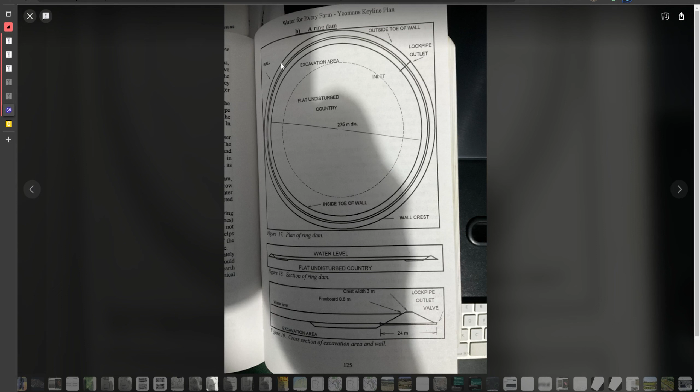You need to pump water to them. So this one is called a complete ring dam or just a ring dam. Then we have also a turkey nest dam, which is another kind of a ring dam that is completely enclosed. And then we have what is called the broken ring dam, which is partially enclosed. So let me show you a couple of images of that. So we can see again the complete ring dam on this picture at the bottom, and at the top we have the broken ring dam.

Now in this video we're not going to cover the broken ring dams because they're kind of very similar to any of the other dams we covered so far. The only difference is that there is a flat undisturbed ground in the middle, and this is also the same for the other dams. But apart from that, they're basically the same as all the other dams that we've covered so far. For example, the contour dam would be very similar to this. It's just that when you're doing your excavation, you're not going to touch a certain area in the middle.

Now, what is the actual area that is left untouched? I couldn't find it from the instructions in the books, so we can use some arbitrary value or dimension for that area. Whereas the actual excavation takes place around the embankment, and then that flat undisturbed area is left in the middle. So we're going to do a complete ring dam, and then we're also going to do a turkey nest dam, and they're kind of the same. So I think the turkey nest dam, the difference with that was that there was no undisturbed ground left in the middle, so that's completely cleared. So those are kind of more simple in that way.

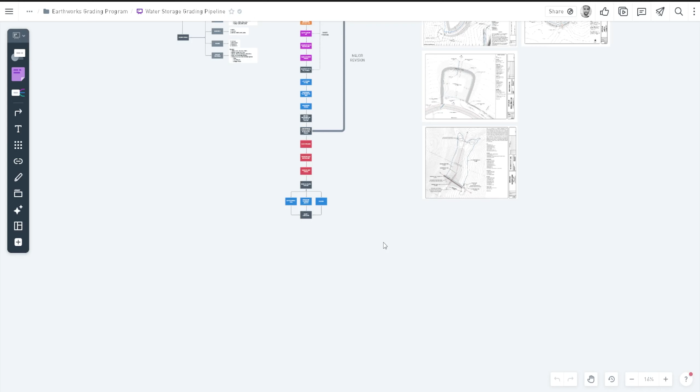Here we have in the book The Challenge of Landscape another diagram of the design of a ring dam. So this is the completely enclosed ring dam with the undisturbed area in the middle. So let's break this down to its building components. I'm going to take a screenshot of this image and paste it in our working document. So I'm going to move that right here and maybe expand the image a little bit so we can draw on top of it. And so the thing that I notice right away is that it follows the same basic components that the other dams have.

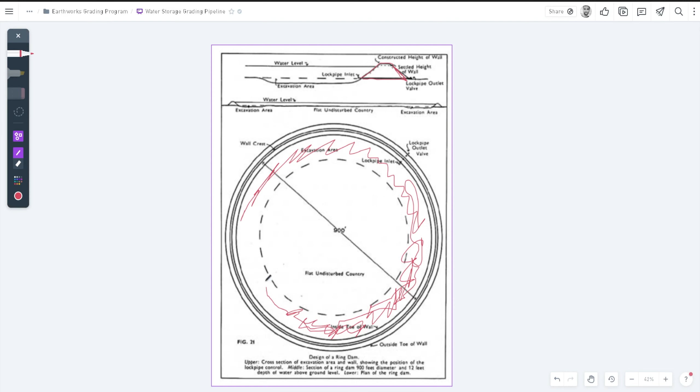We have obviously the embankment right here that encloses on all sides. Then immediately around it we have the excavation area. So all of this stuff right here is just excavated ground, and I'm not sure what is the depth of this excavation or what is the batters of it, but we can work with any arbitrary values, really doesn't matter. I would imagine that it's again maybe at least 1 meter deep below the embankment, and that the batters are 2-to-1, both for the excavation and for the embankment. Although I guess it depends on the site.

The embankment could be with steeper batters because I would imagine these are very low embankments, so they will be more stable even with steeper batters. But of course the material is what's going to dictate this to a good degree, as well as other factors such as the compacting equipment, who is doing the compacting and under what conditions that is done, and so on. But for our purposes we're just going to use arbitrary values for that.

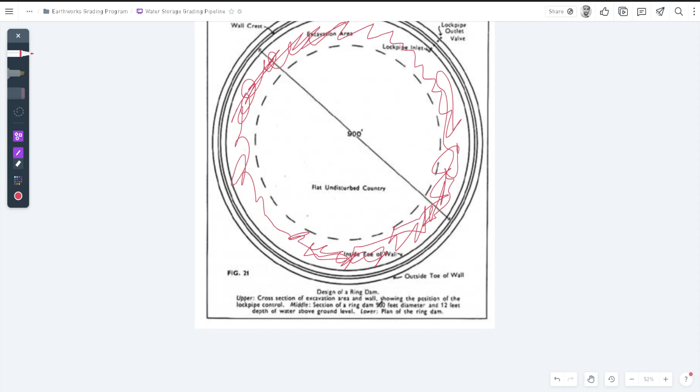Then for the undisturbed country, well, I guess this will depend on the site. Obviously, if we don't have a lot of space for leaving this undisturbed ground in the middle, then we'll just have to narrow it down to a smaller area. And the crest of the embankment seems to be very narrow, so I would put this to be around 2 meters to 2.5 meters. And he actually says here at the bottom that this section of the dam from one crest to the other is 900 feet in diameter, and then we have 12 feet of depth of water above the ground level.

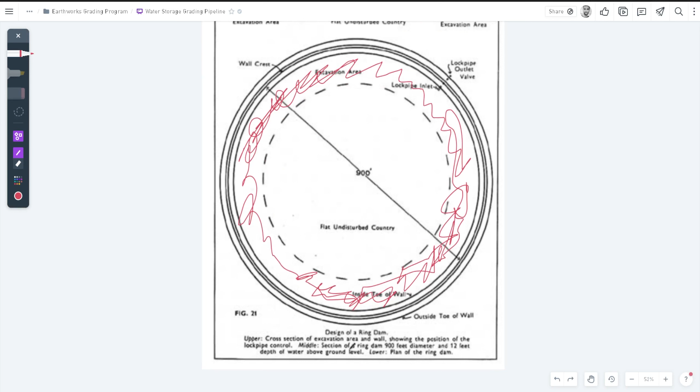So I would imagine he measures it from here up to the water level, so that's 12 feet. But this depends on the site, in terms of water depth. You can't necessarily secure the same water depth on every site. We're just looking at these as indications, not fixed criteria for our purposes.

If we look at this cut section, we can see the embankments on this side and then the excavation right here. Then this is the undisturbed ground. And then we have an excavation on the other side and the embankment there. So this basically repeats all around.

So let's find a site we could possibly use for this. These being the absolute highest dams you can put on any landscape, we need a fairly flat ridge to find a good site. Something very high up in the landscape that you could pump water to, and from there reticulate it. One detail I didn't touch on is that there's a lockpipe on one side, on the lower side of the site.

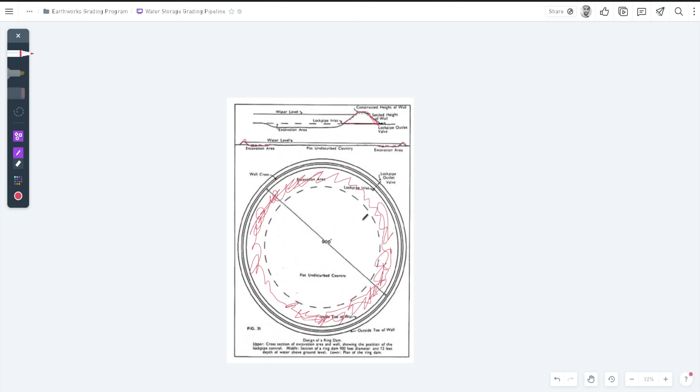We're not going to design these in our drawing because we already did that on other dams. It's basically the exact same thing, so we'll leave those out to save some time. I may dedicate a video specifically to grading the lockpipe trenches for any embankment, but I covered this in depth in one of the videos on the Keypoint Dam, so I might leave that out entirely. Let's start by opening QGIS and try to find a site.

I'm going to use the DTM that you also have in your project files, the same one we've been using all along. Let's extract a contour map from this. I'll select the DTM, go under Raster, Extraction, Contour, and do a 1 meter interval between contours, then run that algorithm. Now with that done, we can exit the algorithm and turn off the DTM.

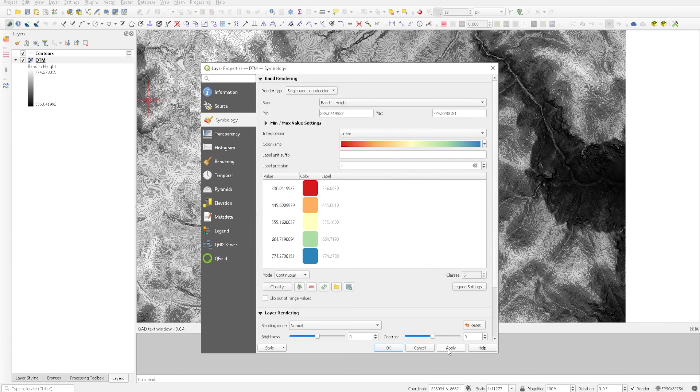Let's select the contour layer and click on the open layer styling panel, and set a black color, maybe a little transparent, so we can see what's happening. Let's also double click on the DTM, go under symbology, and change the render type to single band pseudo color, accepting the default spectral color ramp, then click apply. These will be in reverse, so let's click this dropdown and choose invert color ramp, then apply again.

So let's look for a suitable site. We can see maybe right here we have something, but it doesn't look very extensive, so let's look for something with more space to work with. One thing I forgot to mention is that this shape isn't necessarily what we'll be able to have—this is a very idealized version. What we're probably going to have is a more irregular looking shape.

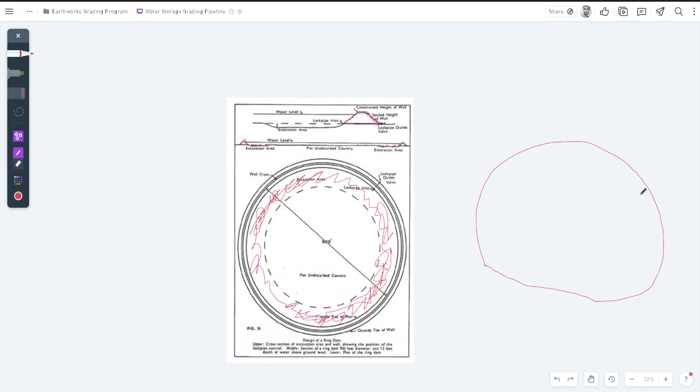Instead of a perfect circle, we'll maybe have something like this, obviously with not so many wiggles, but less regular. It may have a more irregular shape because for the most part we have to loosely follow the shape of the site we're building on. For example, if we build something that's a perfect circle, that would actually be a negative for us because it doesn't fit well with the geometry of the underlying geography.

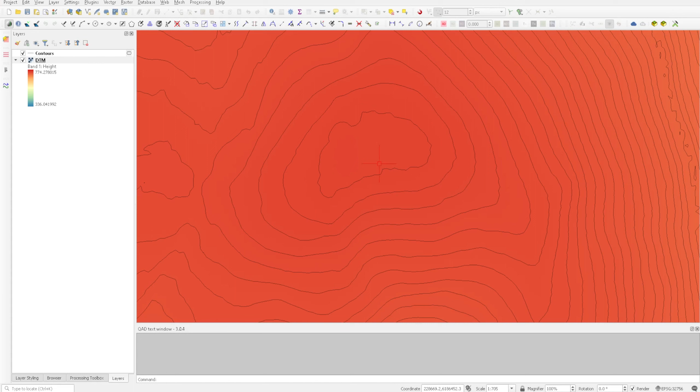That would create a lot more fill material than necessary. So if we loosely follow the geography of the ridge right here, we'll probably get away with needing less material. I'm just going to observe here and try to find the site. This one right here looks more or less okay, just about here. Let me look around a little bit more—we possibly have another one right here.

I think I'll go with the wider one I found, which was around 100 meters. Was it this one? Yep, so maybe we'll go with this one. With that selected, let's create a new layer. Click on the new shapefile layer button and call this boundary. We'll set the geometry type to polygon and press OK.

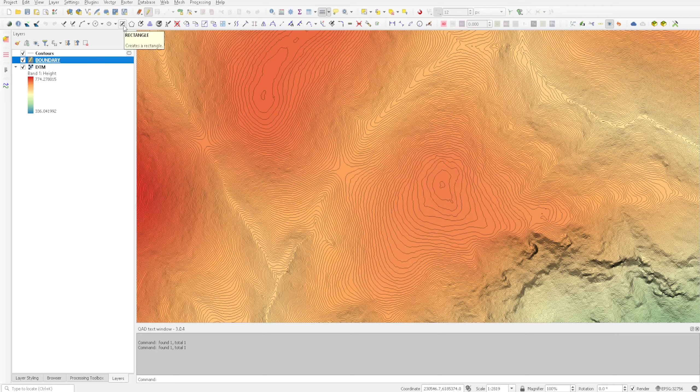Then we will select this boundary layer and enable the editing. With the QAD plugin, we are going to use the rectangle tool and make a rectangular shape right here, so we can crop out this site. With that done, we can select the boundary, toggle out of the editing, and save the changes.

Then let's select the contour layer, go under vector, processing tools and clip. For input layer, we will have the contour layer. For overlay, we will have the boundary, and we will run that with these options. Then we will exit out of the algorithm and hide the contours, the boundary, and the DTM because we don't need them anymore. This is the clip map that we're going to work with.

Now from here, we should clean this map up before we continue, as we always do. So let's select the clip map and right click first and make a duplicate layer, just so we can preserve the original in case something unexpected happens. Then select the clip map, and let's first of all clean up any small noise that we have, like this one right here.

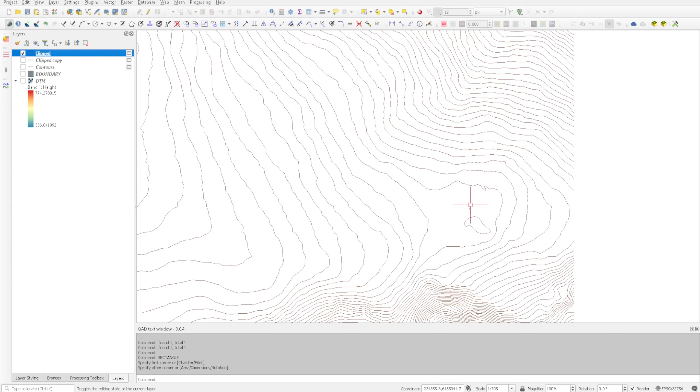So let's toggle on the editing. Go under the select features by expression tool, and in the expression field type $length smaller than, let's try a value of 25 meters, and click on select features. You will see this is going to select some of the noise, but it also selects some of the contours that we do want to preserve.

So maybe let's reduce this to 15, even that's too much, maybe 10 or even 5. There's not a lot of noise on this map actually, so that's all right. And with that done, we can actually, maybe there's a little bit more. Let's go with 10. Yep, this one got selected now.

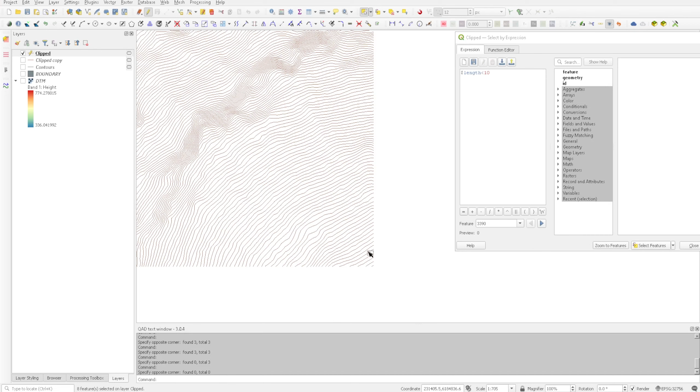Now let's close out of this and we can zoom in here. Then let's go back up to select features, select this tool, then hold the control button and make a marquee selection, just the left mouse button holding and dragging out, and select these contours holding the control button. This will deselect them basically, so we don't delete them, because I don't want to delete these major contours. I just want to get rid of the noise.

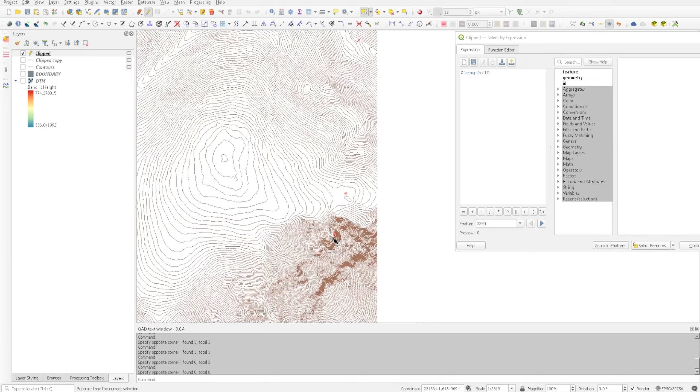So we can also do that for this one on the edge right there. Again, just holding the control button, left clicking and dragging out the selection, you can deselect those. Let's also zoom in here and see what's happening with these ones. Okay, that's all right, we can delete that one, we don't need it. With that done, we can then just click on the delete button right here, delete selected, and that will remove them.

The next thing we should do is to toggle out of the editing and click to save the changes. Then with this contour layer selected, let's type simplify in the bottom left corner of QGIS, there's the search field, and double click on the simplify tool. For the tolerance on this algorithm, we're going to use I think 0.5 will be enough. Simplification method will be set at distance, and then we will click on modify features. This will remove many of the unnecessary vertices or points on these contours.

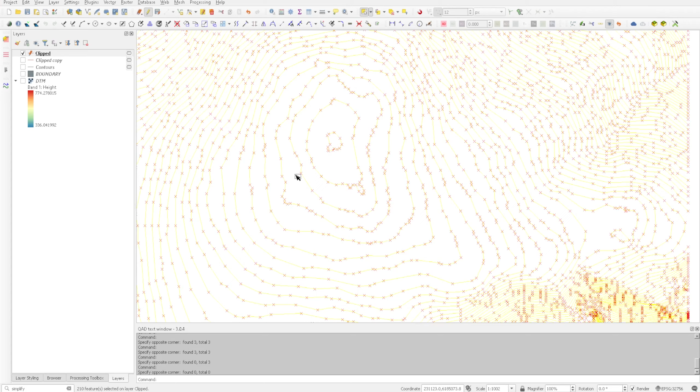Then let's close out of this algorithm and zoom in here to see how many vertices are left. So this looks pretty good to me. It didn't remove too many points, it removed just enough, so we can work with this.

Another thing we should do while the editing is still toggled on is to go back to select features by expression, and in the empty field type geometry is null. So we will use this basic script to select any geometry on this layer that may be empty, because that can cause issues. Just click on select features. In this case it didn't find anything, so that's good. Then finally let's select this layer, toggle out of the editing, and choose to save the changes.

Now we can rename it. So right click, choose rename, and let's call it contours-1 meter. Then we can right click and choose export, save features as. I will export this as an ESRI shapefile and uncheck ID and FID because I don't need those inside of Civil 3D. I will uncheck add saved file to map, and then click on the ellipsis button under file name.

I will save this to your project files for the ring dam video, and I will call this the survey data folder, as all the other ones are also called like that. This will be contours-dash-1-meter. It's also good practice to put the EPSG code 32756, which we can see in the bottom right corner of QGIS, and also under the contour layer itself.

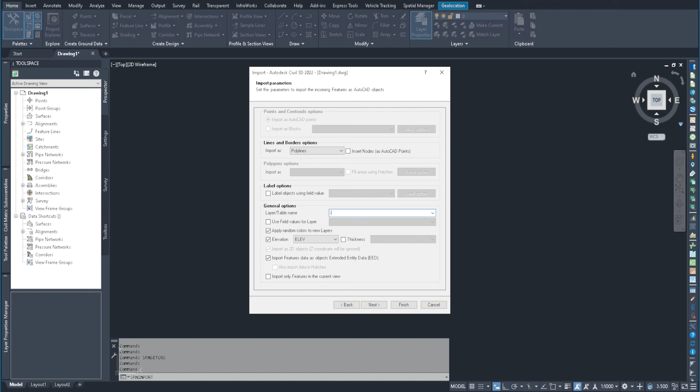I'm going to now navigate to where the files are, which would be under the storages chapter, survey data, and there are the contours. Then I'll click next. The first thing is to check the elevation tab, so just make sure this is checked on under general options, and then select the elevation attribute. For the name, I'm just going to call this 0-contours-1-meter. That's about it. Now you can click finish.

This should import the contours and we will be able to see them here. If you did get an error here, that's okay, you can ignore that, just click close. So here are our contours.

The very first thing to check is whether the elevation data is really there, just to be sure. Select one contour, right click and choose properties, and we can see right here we have an elevation value, so that's a good sign.

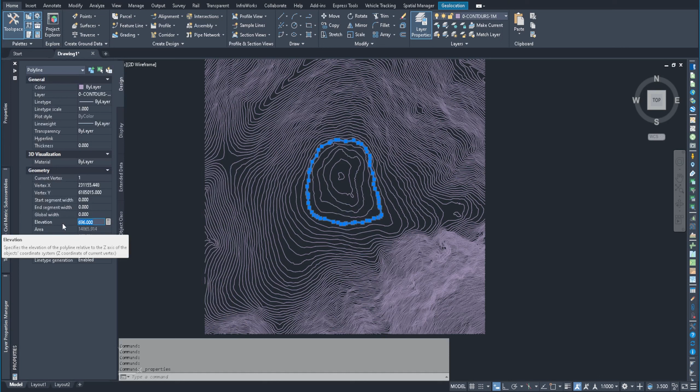Now we can select all of these contours just by either pressing Ctrl and A, or just left clicking, then dragging your cursor out and left clicking again to make a marquee selection. We will create now a new surface just by right clicking on surfaces under the tool space and choose to create a surface.

Let's call this, under name, existing ground. Then for the style, we can change that to 1 meter and 5 meters just by clicking here under style on the ellipsis button, and there is a preset called 1 meter 5 meter background. Let's select that and press OK, and then OK again.

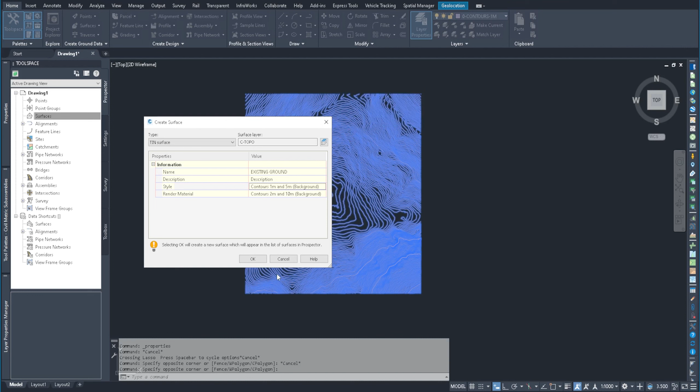Now let's expand surfaces, expand existing ground, and expand definition. We need to tell Civil 3D what to use as a definition to create this 3D surface. In this case we have contours, so we can right click on contours and choose add, and our contours are already selected, so it will detect that. The only thing we need to turn on is swapping edges, so we will turn that on here and press OK.

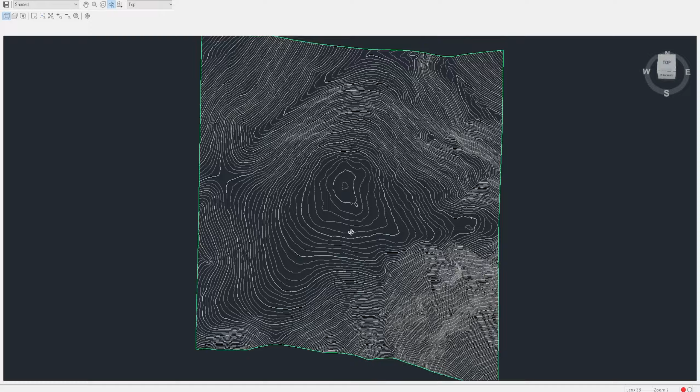And now it will create the 3D surface. There it is - you can know it's a surface because it's outlined by this green boundary. We can also check it out in the object viewer just by right clicking on the existing ground surface, choose select, then right click anywhere on an empty space in Civil 3D and choose object viewer. Now if you just left click, hold and drag out your cursor, you can preview the surface in 3D.

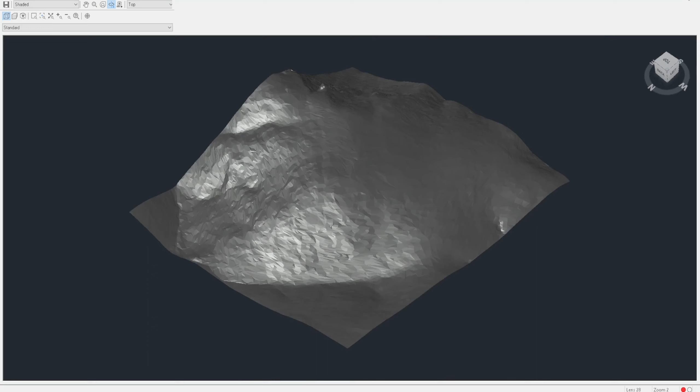If you release the left mouse button, it will show you the shaded model, which you can change the style of from the drop down menu. This looks pretty good - I don't see any artifacting or weird anomalies happening, so we can work with this. Let's exit out of the object viewer just by pressing escape.

And the first thing we should do is to set up our layers. Under the home tab, let's click on layer properties here on the far right. This will open up this window for you. Let's hide the contour layer because we don't need to see it anymore since we already created the surface. But we can create a few new layers just by clicking on the add new layer button.

The first one will be called 0-embankment. Then we will have 0-borrow pit for the excavation pit. Then 0-water level.

Remember, we're not going to have a spillway on these dams. Normally we would have a layer for the spillway, but these dams do not have a spillway, except for the broken ring dam, which does have a spillway through the water conservation channel that connects to it. These other ones, the turkey nest and the complete ring dam, do not have a spillway. They just have a lock pipe that is basically used as a spillway. So we're not going to have a spillway layer. We just have the water level, borrow pit, and embankment.

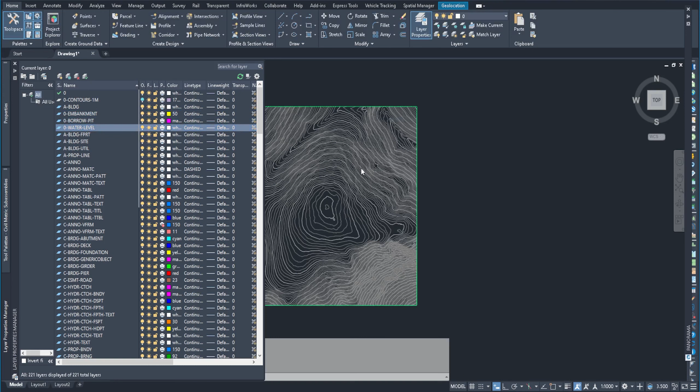I'm going to double click on the color for the embankment and just choose a yellow color for that. For the borrow pit, I'll have the magenta color, and for the water level, a cyan color. We are ready to start laying out our dam. So I'm going to first switch the layer to the embankment layer because that will be the first thing that we're going to lay out.

So I'll go back to Civil 3D, and now we have to start laying out the shape of our dam. Now we can grab a circle from here, and you can either choose a radius or a diameter for how you want to draw this out. It doesn't really matter, but if you want to make a circular dam, you can use that too. You can see how it doesn't really fit very well with the geography of the underlying landscape. So probably a better way to do this is to at least loosely follow the geography of the underlying landscape. This is what I'm going to do.

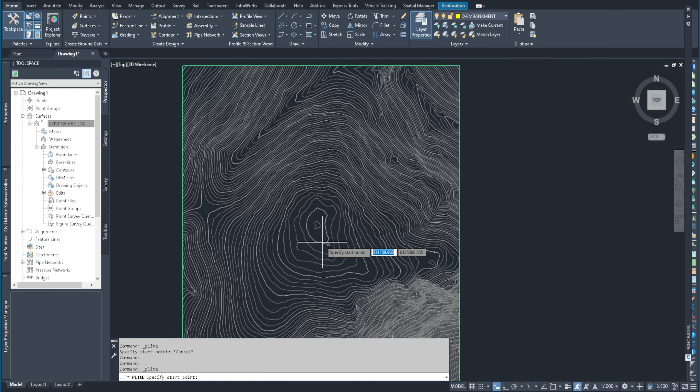The issue with going lower in the landscape is that obviously the embankment will have to be much higher. The lower you go, you have to have a larger, higher embankment, because otherwise the landscape above is going to take away a lot of the storage just by being in the way there. So it's probably best to be as high up as possible with your embankment, but this will depend on the underlying geography of the site. If you have a very flat ridge that is very large as well, that will be ideal. In this case, we do not have that. It's a rather steep ridge, but we can work with what we have.

So I'm going to start right here completely arbitrarily. I'm going to snap to this contour using the snapping tools and use that as a starting point. You don't really need to snap to the contour, but just to have something to start off with. And again, very loosely follow the shape of the contour. You can see the angles are kind of angular. I don't want to snap to each and every wiggle because it's going to create issues for the geometry of the embankment. And then we can right click and choose close to close that shape up. Then maybe let's take this point and position it here. Then I'm going to toggle out of the snapping options.

Now we're going to use the fillet tool to fillet all these angles so that the embankment is more rounded. So let's click on fillet. First let's click on radius down in the command line, and let's experiment with a 50-meter radius. Then click on multiple. I just want to see if this is actually a good radius or if it's too much for some of these angles. You can see it says here radius is too large. So let's go down to 40 meters and see if that works.

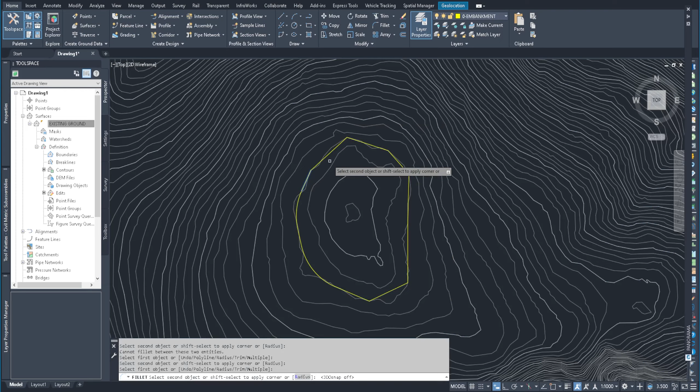So another way we can do this is to bring the radius back to 0. And let's make a 0 radius between these two entities. And then instead of clicking on this segment and then on this segment, we can go straight to the next segment right here. And then maybe let's reduce the radius a little bit to 35 and then bring it back to 40. This is still too large, so let's do 35, 30 for this side.

And then we can do 40 again here, or maybe 30 again. It sticks a little bit better, maybe even 20. This one we can increase a bit to 40. So that's pretty much the shape of our embankment. Now we can right click and press enter.

So we have to choose how high do we want the embankment to be. Currently, the highest elevation that we have on this site is 701 meter. If we leave, let's say, everything between 700 and 701, so this whole area right here, we can leave that as undisturbed ground. So we would want our embankment to be at least half a meter above this. So we could try to place it at elevation 701.5 and see if that works out okay.

Also, the top of the crest of the embankment, I think I'm gonna go for a 3 meter just to experiment and see how that looks. So a 3 meter width for the crest. So let's grab the offset tool and then specify a 3 meter offset and press enter. And then grab the layout of the embankment. And I think in this case I'm going to offset outwards, so towards the left hand side, and left click there. Now we can grab these two lines and convert those to feature lines.

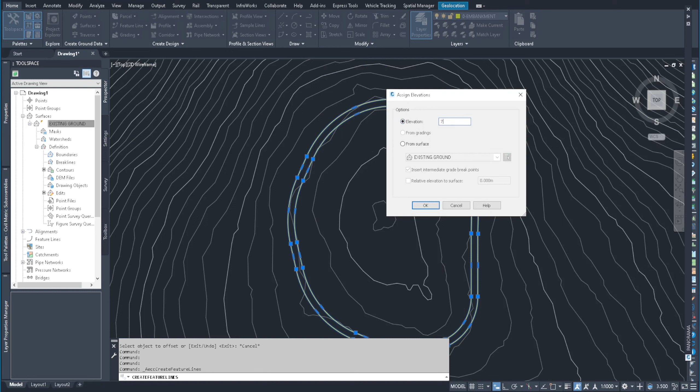So we will select both of them and go to feature line and then choose create feature line from object. And we want to create a new site for them. So I'm going to click on the create new site button and call this embankment and press OK. We will not erase them for now, we will just assign elevations and we'll press OK on that. The elevation will be 701.5 as we just discussed, and we'll press OK on that.

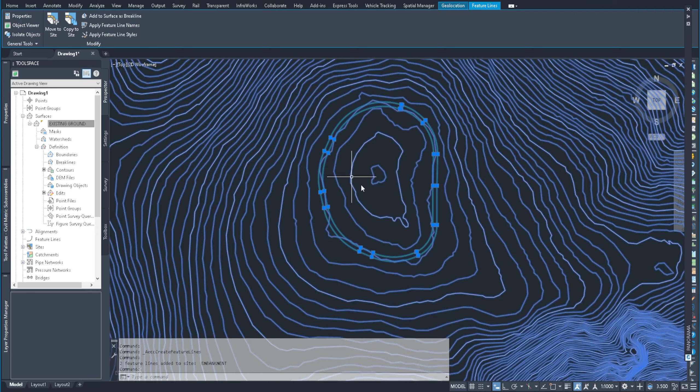Now I'm going to grab these two feature lines and just select also the surface, right click and choose Object Viewer, because I want to see how these look together when we preview them. So you can see the embankment is sitting just above the top there. That looks okay. Let's press escape and see how it's going to look when we grade the embankment. I think for the batters maybe we can go for 1 to 2s.

So let's select the grading tools and choose grading creation tools. And the first thing we need to do is to create a grading group like all the times before. So we're going to click on set grading group, choose the embankment site and press OK. And then we will type embankment for the name, choose automatic surface creation and leave it at the default contours, 1 meter and 5 meter design, and choose volume based surface, the existing ground. And then we'll press OK and OK again.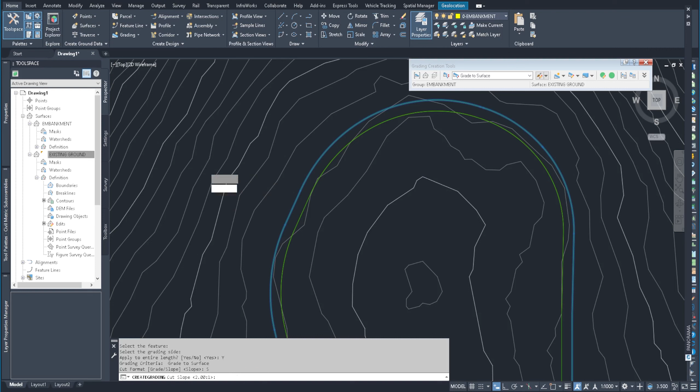And now we will choose to grade to surface and then click on create grading. Now we can first of all grade the external batter. So let's click on the external line, choose the feature line. Let's left click on the left hand side and apply to entire length. We're going to use slope at 2 to 1 and for fill also slope at 2 to 1. Let's see what happens. So this is the external embankment now created.

Let's repeat the process for the internal one. Let's select the internal line, left click towards the internal side, apply to entire length at slope at 2 to 1. And finally we have to fill in the middle of the embankment because it's empty. So let's choose to create an infill and then just left click in the middle.

It's going to be highlighted for you, so just left click there. So now we can select the embankment, right click and choose Object Viewer. Let's see how that looks. So that's basically how the embankment looks. We can also view this in conjunction with the surface. Let's select both of them and you can see how that looks.

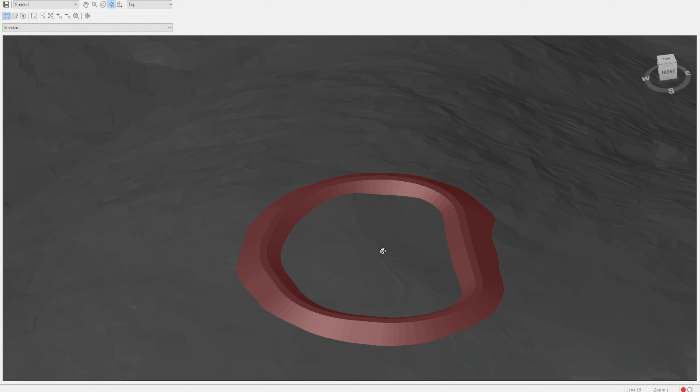So again, we're leaving this middle area undisturbed. We're just going to excavate around the embankment itself, and I imagine that will be done either following the geometry of the underlying landscape or just a specific width of that excavation. Honestly, I'm not sure because I don't know the exact details of how Yeomans would have done these, but I imagine he would have done either one of these approaches.

I think I'm going to use the second approach, just make a regular offset from the edge of the embankment, and that will determine the width of our excavation. And I will try not to go with that offset to a point where we actually cross this contour for the elevation 700, because again, I want to leave all of this right here undisturbed. So our offset will probably extend up to right here somewhere.

Let's switch to the borrow pit layer and choose a polyline. And now we want to roughly trace out the embankment. We can use the snapping tools for this. So just enable snapping tools, and we're going to use the endpoint mostly. So I'm going to snap to, you see where we have these lines crossing the embankment? There are points right there. So if we snap to these, I would imagine this will be okay.

We can later create curves between these segments, so we don't need to worry about that now. So I'm just going to snap to these points. You can see it's not at all precise. And then we're going to right click and close once we do that. Then let's grab the borrow pit line and then hover over the segments, and you will see that you have the option to convert this to an arc. So let's choose that and then just snap to the embankment right there.

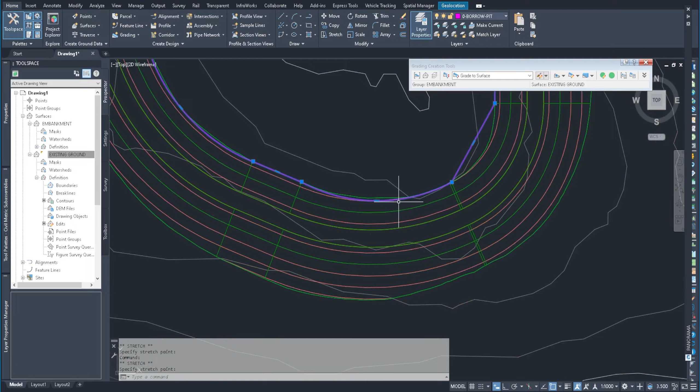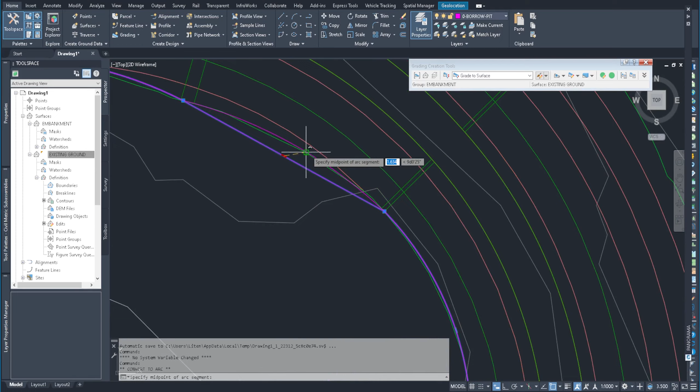It's okay if the arc goes a little bit into the embankment, that's fine. Also snap right here for this one. And just one right there, or rather right here, the innermost point. And we have another one right here, something like that. Now we can take this and convert it to a feature line, and then we will create

our offset from it. So I will select the borrow pit line, go under feature line and choose create feature line from objects. Now we need to create a new site again. Let's click on that button and call this borrow pit. We will not erase it, just assign elevations, and we will pick up the elevations from a surface, but do not insert any intermediate points. The surface we want to choose in this case is the embankment, so we're going to select that and press

OK. Now we also need to create a new grading group, so let's click on that button and switch to the borrow pit site and choose to create a new group, and we will call this borrow pit again. And we will have a volume-based surface, which is the existing ground in this case. So let's press OK on that and OK again. OK as well. So first of all, I think we need to grade down.

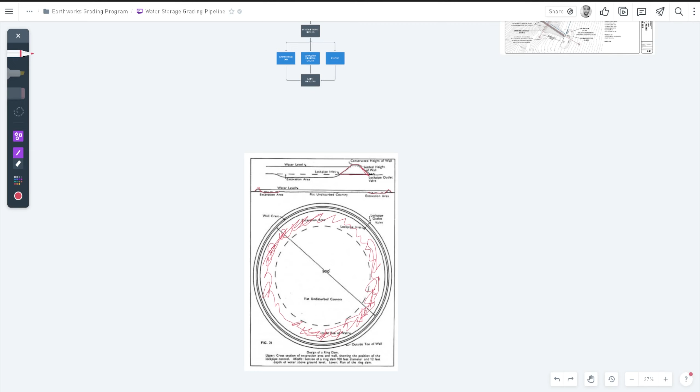If I go to the document, currently we are at this point right here. We have created just a single line around the edge of the embankment. What we need to do is to grade down to an exact elevation, and we will do this at a slope of 2:1, and only then we will create the offset, and then we will grade upslope to the surface again at 2:1. So I think that is probably how it's going to work.

So to determine this elevation to which we need to grade down, we can just take the bottommost side of the embankment and go down 1 meter from there, and that will give us an elevation that we can work with. Of course, depending on the project, you can go deeper than 1 meter, but we can start with 1 meter for now. So let's go back to the drawing, and now we need to select the innermost side of

the dam, which would be, I believe, this feature line. Let me check, yep, so you can see once you select the feature line and go to the properties just by right clicking and choosing properties, under the data section you have site, and there it will tell you which site this feature line is on.

This is on the embankment, so we know this is the embankment feature line. Now notice also it says the minimum elevation is 698.231. So if we go 1 meter below this, it will be 697.231. We can also go maybe 30 centimeters deeper than that, just to account for any stripping of the topsoil, as I mentioned previously in other videos, but obviously that would also depend on the site.

Maybe you don't have 30 centimeters of topsoil, but just to take some value in this case, arbitrarily we can use 30 centimeters. So it will basically be down to elevation 697 if we were to round it up. So we can use that just for simplicity's sake.

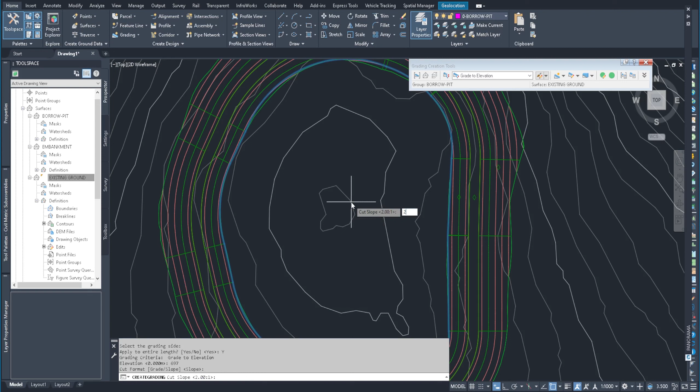So let's switch the mode here to grade to elevation and choose to create grading, and then click on the feature line, and then we want to grade towards the interior. So we're going to left click there and choose to apply to the entire length, and we will choose elevation 697, and for the cut format we will choose slope at 2:1 and fill slope at 2:1. So that created that grading.

Now we need to grade to distance, so let's switch the mode to grade to distance, and we can do a completely flat bottom. We don't have to have any slope on that, so let's select the create grading option and grab the innermost feature line, choose to apply to the entire length, and then we have to choose a distance. If you just move your cursor, it will tell you the distance or how far you are from the edge of the line.

Now we can see that at around 10 meters or so, or up to 12 meters, it seems to start rubbing against the edge of this here that we want to preserve. So maybe we can do something like 10 meters. So let's type 10 and press enter. And instead of using slope for the format, we should choose grade, because grade is the only option that will allow us to do a flat bottom. So let's choose grade and then type 0. And then this will give us our 10 meter offset.

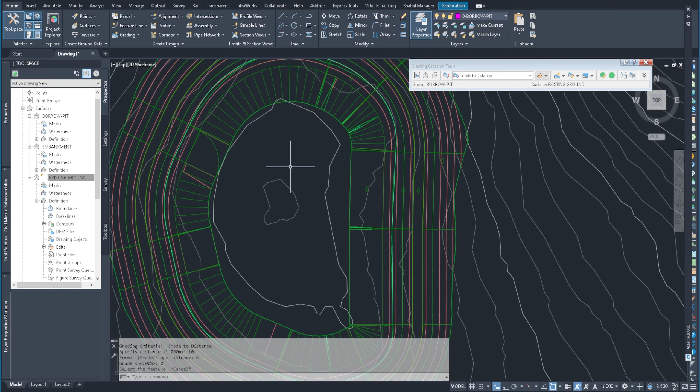It is actually a little bit too much. It starts interfering with the top that we want to preserve. So let's go back to our grading creation tools and choose to edit grading, and then just left click on the grading that we just made. And instead of 10 meters, let's type maybe 7.5, and again choose grade at 0. Okay, it did the processing, but it looks pretty bad. Something has completely gone wrong here.

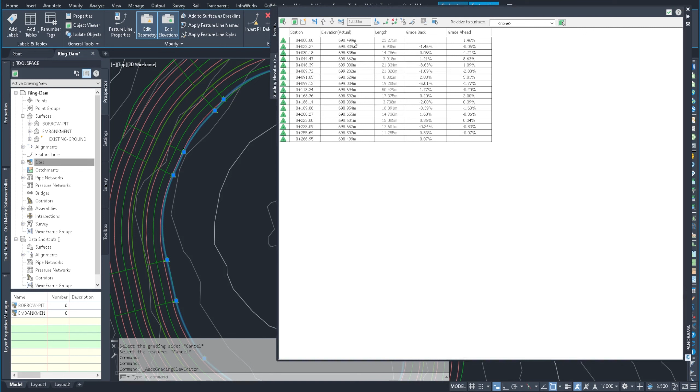So let's select the delete grading option and just left click on the grading here, and maybe redo the original grading down to the elevation 697. I'm not sure why it did that, but let's do it again. Before I do that, let me just check. Select the feature line and click on elevation editor, and this will bring up the panorama. Just make sure you don't have any blank elevations, because it could be getting confused because of that. Didn't see any.

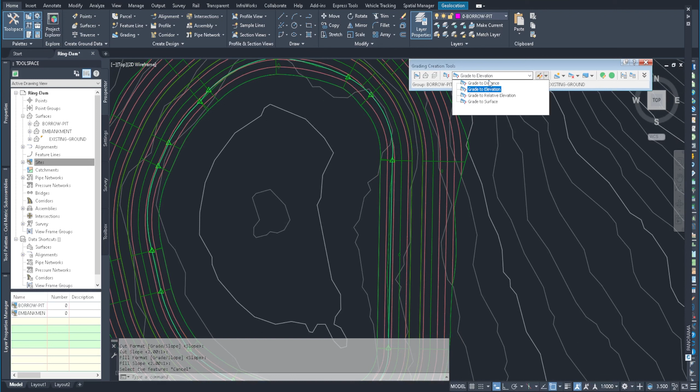So let's go back to grade to elevation, feature line, and then select the grading side, apply to entire length, 697 at slope of 2:1. So this is looking good. I don't see any issues. Now we can choose grade to distance and try again. If that doesn't work, I'll show you an alternative way. So let's do 7.5 meters. Format will be grade at 0%.

So again, it seems to be slowing down. For some reason, it's doing a lot of calculations, which is really odd. So you can see it didn't actually do anything. Okay, so we can do an alternative way. Let's select the feature line. Actually, what we need to do is to trace this feature line first of all.

So let's select the Home tab and switch to the polyline tool, and then just quickly go around and trace the feature line just like before, very loosely. Once you get towards the end, right click and press close. Then just like before, grab the segments, and you can press Ctrl twice. Once will let you make new points. If you press it again, it will let you convert the line to an arc, and that will allow you to grab the segments and quickly convert them to arcs, and then you can snap to the feature line. So just go all around and convert all of these to arcs.

Now with that done, we can offset this line. So let's grab the offset tool, and now let's do our 7.5 meters. So type 7.5 and offset towards this side, just left click there. And that looks just about right, I guess. We can leave it at that and experiment to see what happens.

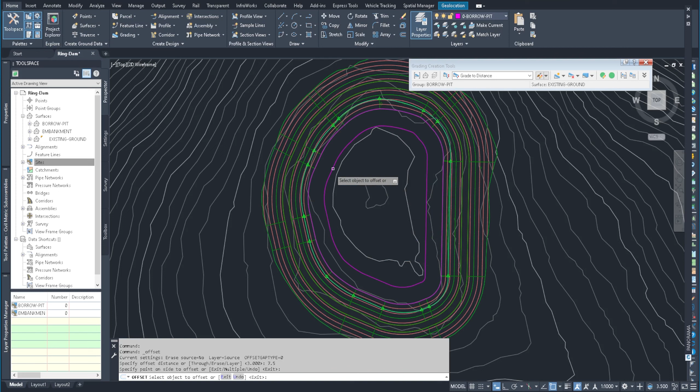Maybe actually 7 meters will be better. So let's select the line again and do 7 meters instead. And we can delete the outermost line. With that done, we will convert this line to feature line and place it on the same site. And we will place it at elevation 697.

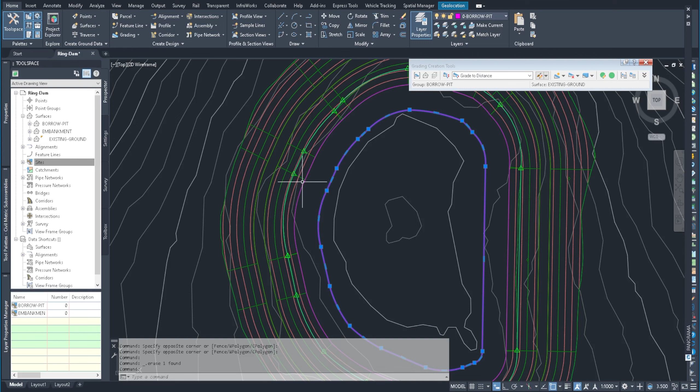So basically we're doing the exact same thing that we wanted to do with the grading tools, but because they didn't work, we can approach this differently. So if I go back to the document, like before, we already have this line right here, and we already created this grading down to the elevation right here. What we don't have is this line right here. We couldn't create that because the grading tools were misbehaving.

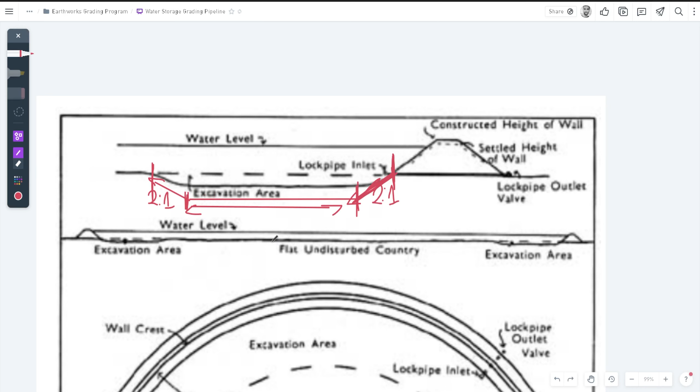So instead, what we're creating is this line manually on the other side. And now we will place it at elevation 697, the same as this elevation right here. And then because they are on the same site, they will be able to see each other, and they will automatically connect to each other like that. So this grading here will be automatically created, and they will create this kind of a flat plane.

And also then we will, actually, I'm sorry, I explained this incorrectly. We started this line right here. So we haven't actually created this batter right here. So now we just offset it and created this line at this side. And we will place this at elevation 697, just like this side right here.

Then, because we put them on the same site, they will connect to each other and they will create a flat plane. And from there, we can grade upslope to the surface at 2:1. So I'm sorry about that confusion. We didn't start the line here. We actually started it right there. So let's go back to Civil 3D and create a feature line from this.

Again, it's important that they are on the same site, so this will be on the borrow pit site. So we are basically placing them in the same universe so that they can interact with each other. If we place it on the embankment site, they will not be able to interact with each other, so that's really important. So let's place it there and assign elevations.

We're not going to erase it for now. We're just going to press OK on that and switch to elevation. And we know the elevation has to be 697, the same as the bottom of that grading we created earlier. And we'll press OK on that. They will not automatically create the surface. We need to infill, because this area right here is now empty.

So if we go under infill, you can see it's going to highlight it. So we can left click there and then press escape. And this will create the grading just like that. So if we select this surface now, right click and choose object viewer, you can see this will be basically a flat plane. So this is one way to circumvent grading tools if they don't work for you.

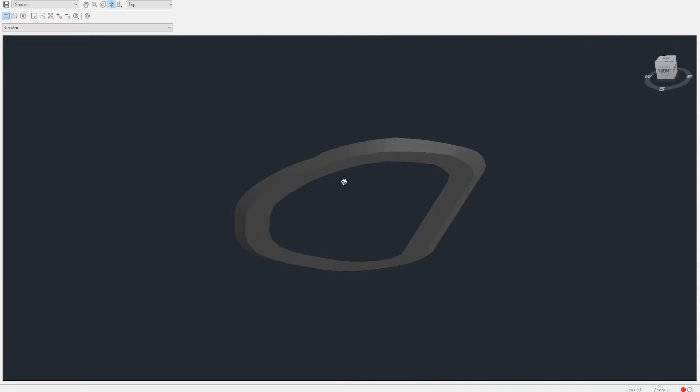Bear in mind that you can create any kind of grading using only feature lines. You don't actually need to use the grading tools. They just make things a little bit easier, but if they don't work, you can use this approach instead. Now that we have created this plane right here, this bottom, all we need to do is to grade up to the surface on that side on which the undisturbed ground is.

So let's choose grade to surface, choose create grading, and then we grab the innermost feature line, and then we want to grade towards the interior. We apply it to entire length and choose cut slope at 2 to 1 and fill slope at 2 to 1. And let's see what happens. So this doesn't look too bad. It does disturb the ground there a little bit, but otherwise it looks fine actually.

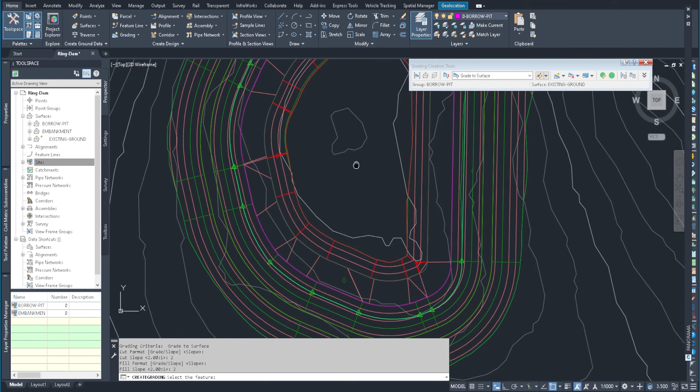Let's create a new surface and go under surfaces, right click there and choose create surface. And let's call this final ground. We can leave the style the same, just press OK on that. Then expand final ground and expand definition and select edits. And now right click and choose paste surface.

And we're going to start pasting our existing surfaces into this final ground surface, starting from the bottom up. So first we're going to have existing ground, then borrow pit, and finally embankment. Let's choose the existing ground first, then right click again and choose paste surface, paste the borrow pit, and finally paste the embankment. I actually pasted the borrow pit twice, so let me remove that

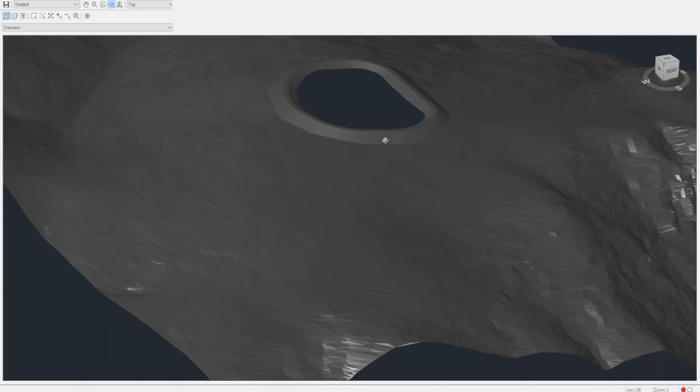and paste the embankment instead. I'm going to right click on final ground and choose rebuild automatic, then right click again and choose select, and then right click and choose object viewer. Now you can see how that looks, and currently it is empty in the middle. We have to fix that up.

Let's infill the middle because I forgot that it's actually still empty. So we need to go to the grading creation tools, being already on the borrow pit group, and choose create infill, then just left click there in the middle. And now if I select both of these surfaces, we should see that the middle is actually flat.

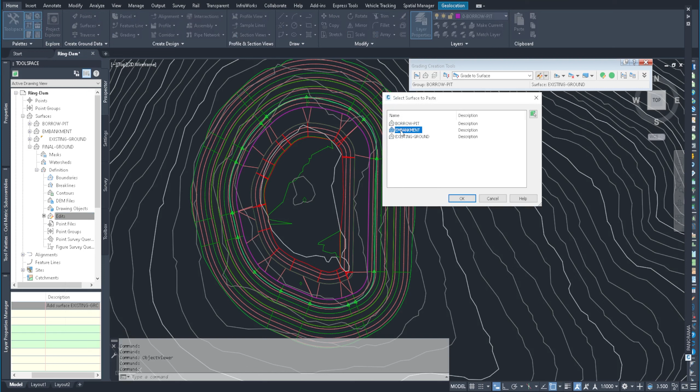Now we can go back to the final ground, go under edit, right click and choose base surface. Just like before, we will start with the existing ground, but this time the borrow pit will be at the top. So our embankment is going to be next, and then the borrow pit is going to be last. It's very important in which order you paste these surfaces depending on the dam design.

Obviously it's very uncommon that the borrow pit will be last, but in this case I think we may have to do that this way because the borrow pit is actually sitting at the very top.

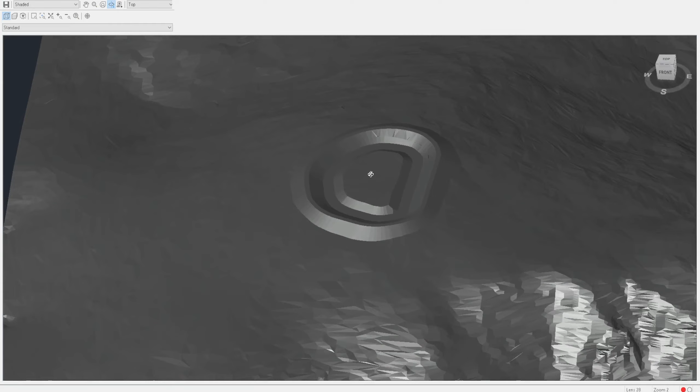And so there we have it. Now it looks a little bit more accurate. I still see a couple of issues. First is these seams. And this is why the embankment usually goes last, because the embankment tends to sit on top of everything, so it does cover these seams and ties everything together. But in this case, I think if we try to do that, I'm just going to quickly try and do that.

It's not going to work. It will leave us with an empty hole in the middle. But let me just try again. I'll just paste the borrow pit and then paste the embankment last. Then select the final ground and choose object viewer again.

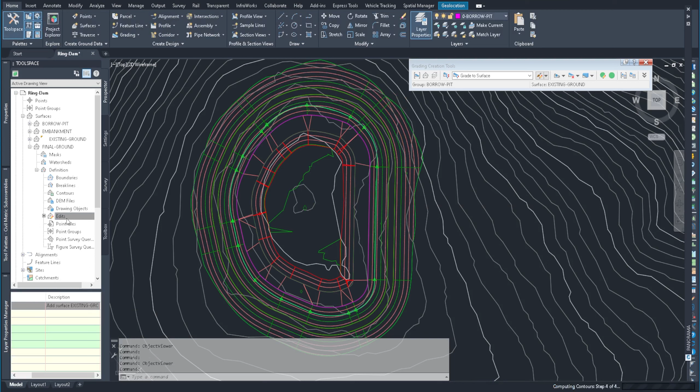So let's right click and delete everything except for the existing ground and reorder things again. This time the embankment will go first and the borrow pit will go last. Now let's check this again, and maybe we can think about how to fix those seams.

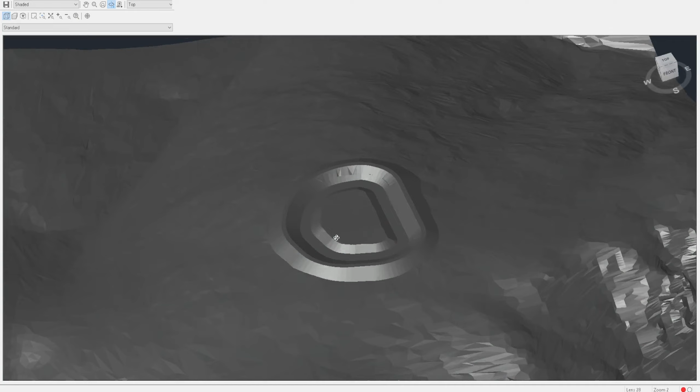Basically what we will have to do is make sure that the borrow pit is well connected to the embankment, but otherwise it doesn't look too bad. This is enough for a decent volumetric analysis. So I'm going to right click on the final ground and choose surface properties, then switch the surface style to no display and press OK just to hide it temporarily.

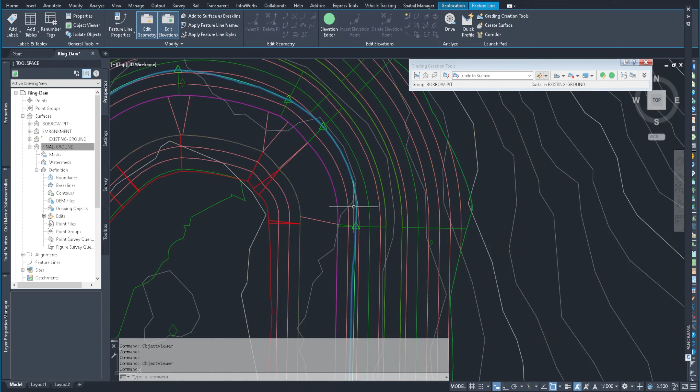And then I'm going to zoom in here into the borrow pit and select its feature line. I just want to see if everything is well connected. So I think this is the feature line of the borrow pit. We can confirm this by right clicking and going under properties. And we can see the site is the borrow pit site.

So that's fine. We just maybe need to move this a little bit further in. And it may help to turn off the snapping options by pressing F3. And then we can move this a little bit further in to the embankment.

And this should automatically update any other surfaces that are related to the borrow pit, such as the final ground. Actually, it's a good idea to turn on the snapping and then try to snap the feature line to one of the embankment's contour lines, just so that their elevations tie in together, because they will pick up the elevations off of each other.

So I'm going to snap them to the red line basically, and then we will see how that is going to look. When you're doing this, just make sure that you save your drawing often, because it's going to do recalculation of the surfaces on every point that you move, and there's always danger that something will break.

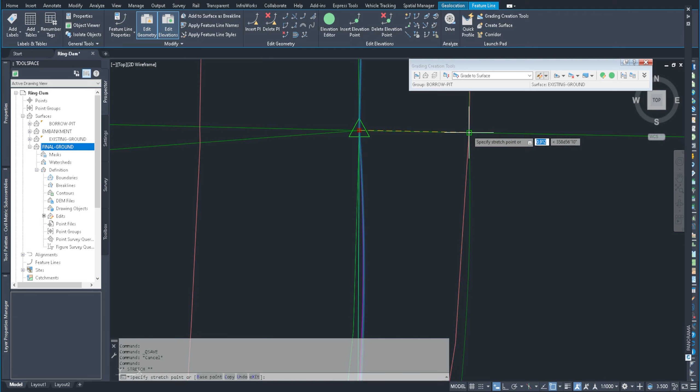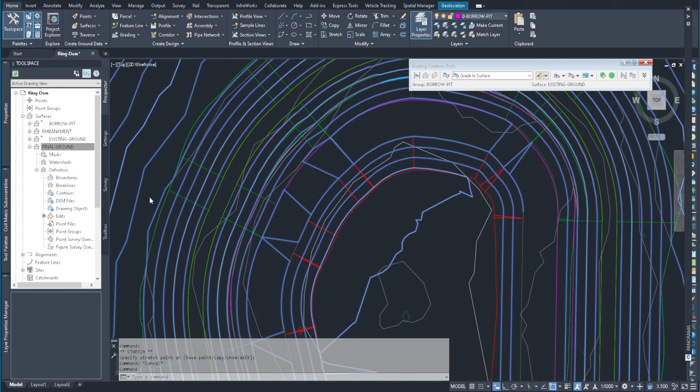Just to see if everything works better now, I'm going to right click on the final ground, choose surface properties, and bring back the 1 meter and 5 meter style. Press OK. Then right click on it again, choose select, and then right click and choose object viewer.

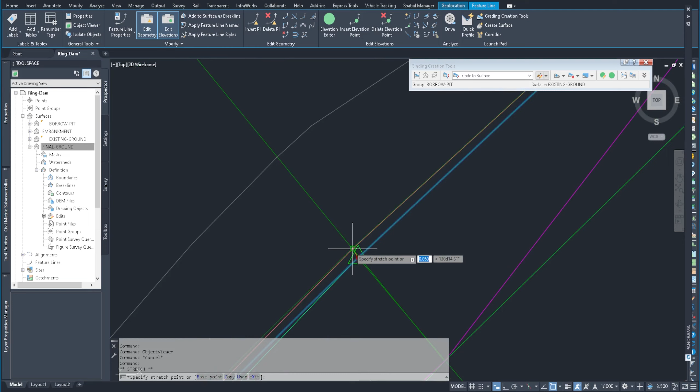Let's zoom in here. For the most part, we corrected the seams right here, but there's still one seam right there, so we can quickly fix that one. Now if we select the final ground again and preview this, okay, it's still there. It's actually right here, you can see it. So that's the seam there.

Now I believe that this would probably be fixed. So let's select the final ground again, go to object viewer, and for the most part it's fixed. There's a little bit left there, so that's, I think, this one.

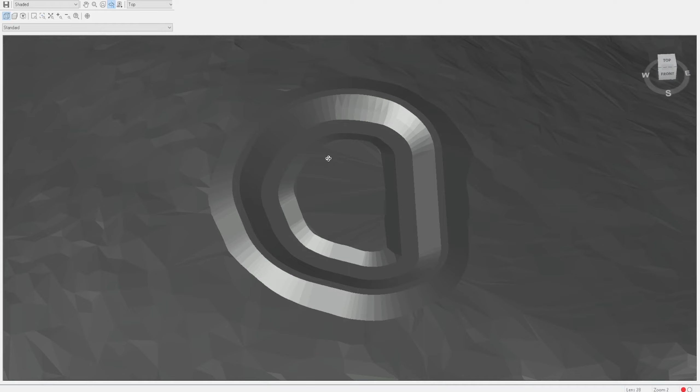Now let's preview this, so you can see now it's pretty much gone. And that looks a lot better. It also fixed some of the artifacting on the embankment itself. So I'm happy with that, and I think I'll leave it like that.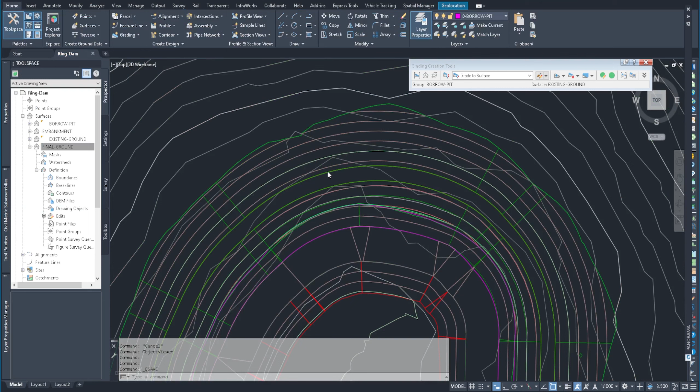Just to quickly mention how we would do a turkey nest dam, which basically means removing the undisturbed ground in the middle, so it will be completely flat. I'm going to actually save this drawing now as a ring dam, and make another copy of this and call this turkey nest. In that one, we can redesign this a little bit just to make it completely flat.

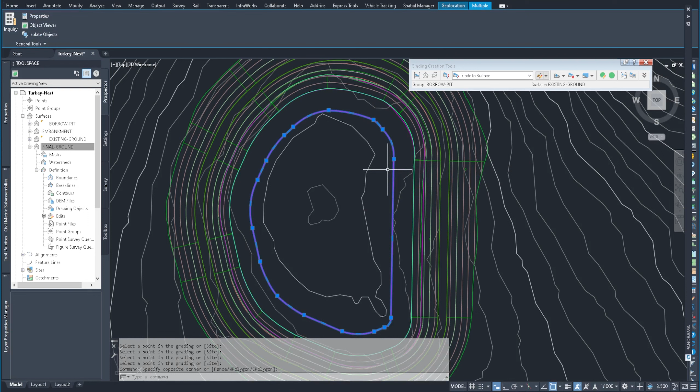So it will be very easy. All we have to do is go here under edit grading and choose delete grading instead, and all we want to do is basically delete the grading for the borrow pit. So just delete everything, and we can also grab the interior of the feature lines there and delete that as well. So basically the only thing we need to do now is infill the middle.

So just create an infill and left click in the middle, and this will create a completely flat plane. If we select this now, you can see that looks completely flat in the middle. So that's a turkey nest dam basically, it doesn't have the undisturbed ground in the middle. And yeah, that's basically it. So you can quickly convert a ring dam to a turkey nest dam.

Now the last thing that we may want to do is to export this out, maybe to something like Google Earth. So before you do that, just make sure that you save your drawing. I'm going to save this again under the turkey nest. From here, what we can do is just maybe select the final ground surface if that is what we want to export.

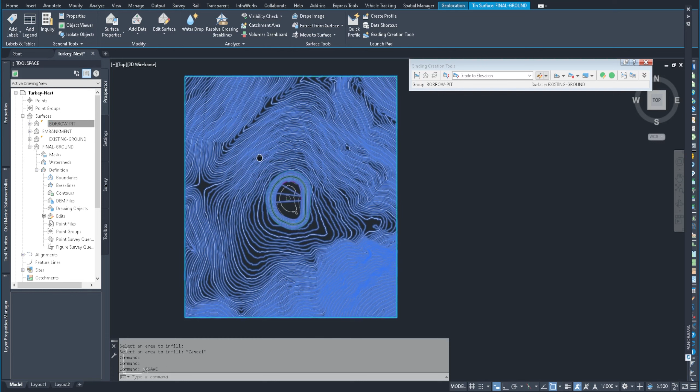Then with that done, we can type explode, and then again we can select it. It's going to be a block reference after the first explode, so that's okay. Just select it and type explode again, and this will convert everything to just basically polylines.

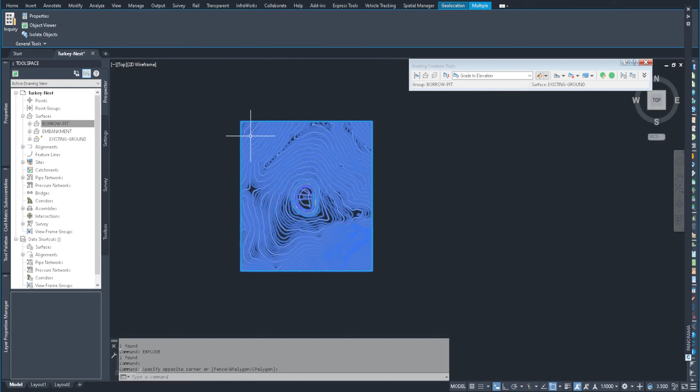So with that done, we can now select all of this and export it out to Google Earth. Just grab everything, and then in the Spatial Manager toolbar, you can click on Export to Google Earth. It will say that it's not going to export certain objects. That's okay, it's not going to export the borrow pit and the embankment and the existing ground because these are special Civil 3D objects. It's also not going to export any feature lines and any grading objects.

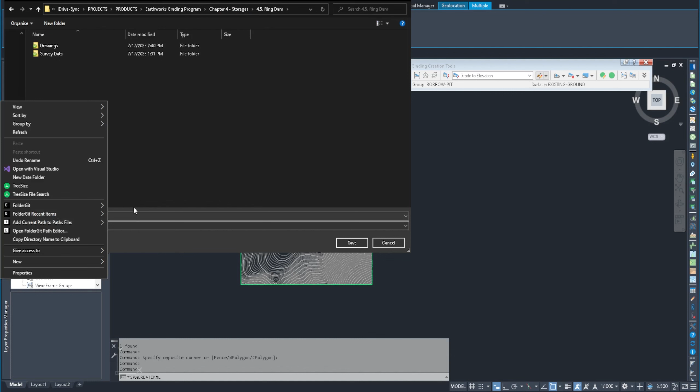But that's fine because these are the ones we don't want to export. We just want to export the final ground, which we already converted to simple polylines, so it's going to automatically select just that. Then we will press OK, leave it at only selected objects and press OK again. I'm going to put this again in your project files under ring dam, under the folder called exports, and this will be called turkey nest. With that OK, you can just click on open in Google Earth, and so there it is in Google Earth.

This is the turkey nest variation. It did preserve the borrow pit outline and the crest outline.

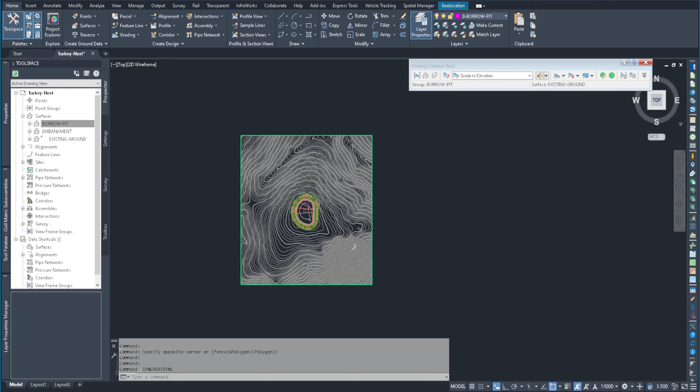Another thing we may want to do is to also measure the volume of this. So let's go back to Civil 3D and measure the water volumes, the embankment volume, and the cut volume from the borrow pit. I'm going to undo the explodes just to bring back the surface, the final ground surface. So just press Ctrl and Z until I see that appear.

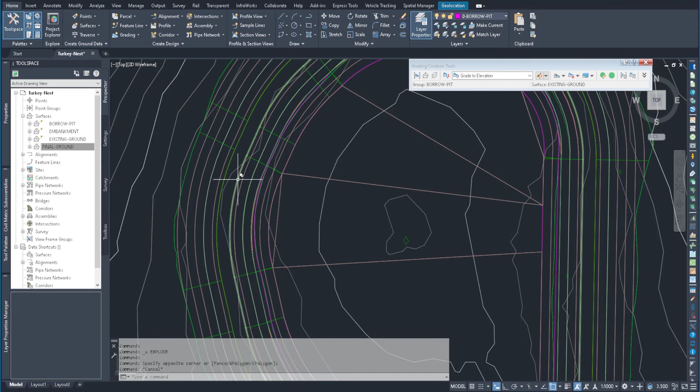Now we need to create the water outline. That will be at elevation 701, which is right here. So remember, we have just half a meter of freeboard. Our crest is at elevation 701.5, so our water level can be at elevation 701. I'll switch the layer to water level and take a polyline and then just trace out this one contour here. This red line is actually elevation 701.

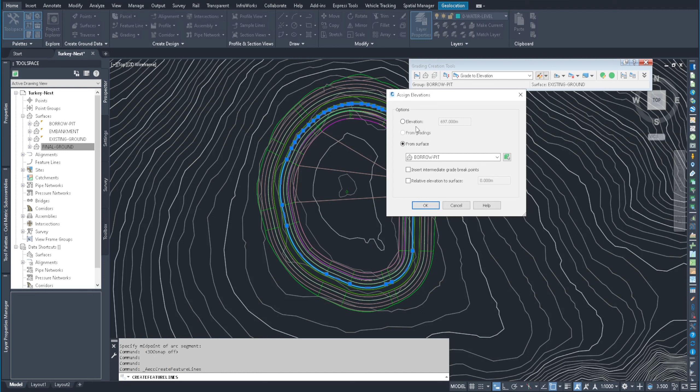So the water level has been outlined now, and we have to convert this to a feature line. With that water level line selected, let's go to feature lines and create feature lines from object. We need to create a new site for this, and we will call this water volume and press enter. We will not erase the entities, just assign elevations.

This will be at elevation 601, and we'll press OK on that. Now we need to create a new grading group, and we will call this water volume and place it on the water volume site. Very important here is to choose volume-based surface and choose the final ground, not the existing ground. Choose final ground and press OK, OK again, and OK again.

The only thing we need to do is to infill the middle. So let's grab an infill and just hover over the middle and left click there, and this will fill the surface there with volume. Now let's type report surface volume and press enter, and this will bring up the panorama. We need to create 3 entities here.

So just click on this first button on the top left. The first one will have a base surface for the existing ground, and then the comparison surface will be embankment. The second one will be existing ground and borrow pit. And finally, it will be final ground and water volume.

So we can see right here that the embankment has a fill requirement of 11,800 cubic meters. Then the borrow pit provides only 13,000 cubic meters, so there's a shortage there. We could remedy this by just digging in deeper, so that's one way to fix this. And the water volume is actually 21.8 megaliters, so not too bad.

One thing you may want to do is to also increase the fill factor for the embankment, just to account for any settling of the material. A good number to go with usually is between 10 to 30%. We can use 10% in this case. So if you just type in 1.1 here under fill factor, it will give you an adjusted fill volume, and you can see that's 13,000 cubic meters against what was previously just 11,800.

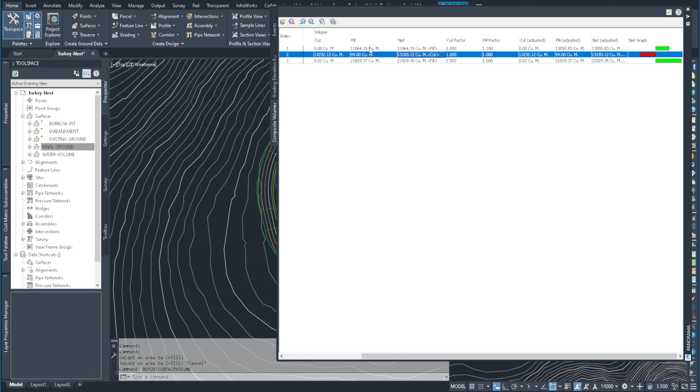Ideally, your borrow pit is going to provide for the adjusted fill, not for the one that is without the settling rate accounted for. Of course, if the project permits, so all of this depends on the objectives of the project and the budget of the client and so on.

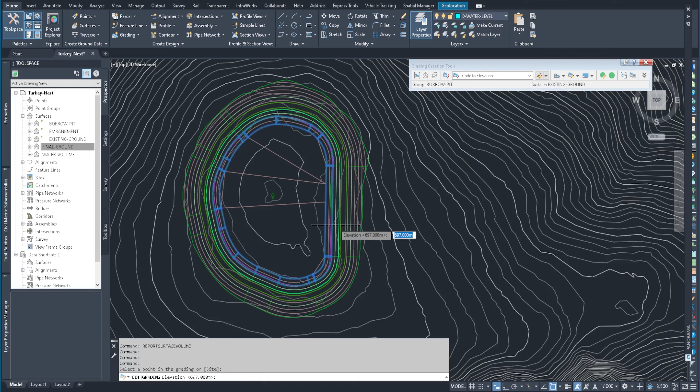But assuming that it is allowed to do it and it is actually physically possible, it's possible to dig deeper on that site. All we have to do is to switch the grading group to the borrow pit, press OK on that, and then click right here and choose Edit Grading. Then just left click on the borrow pit, and instead of elevation 697, let's try 696. So instead of 1 meter, we're going to do 2 meters deep.

Press enter. The slope for the fill and cut will stay at 2 to 1, and then this will recalculate everything. When you press escape, this will also update the other surfaces. Now we can open up the panorama again, and all you have to do is click the refresh or recompute volumes button. You can see now the borrow pit was updated to provide a lot more volume.

So this is just too much. We can come back here, choose edit grading again, left click on the borrow pit, and let's try 696.5. But basically we'll just use this back and forth process to adjust the borrow pit volume. You can see this is even too much again, so maybe we have to do 696.7 or maybe 75. Let's recompute again.

We're getting there, maybe 696.85. Yep, so something like that. It's good to have a little bit of surplus.

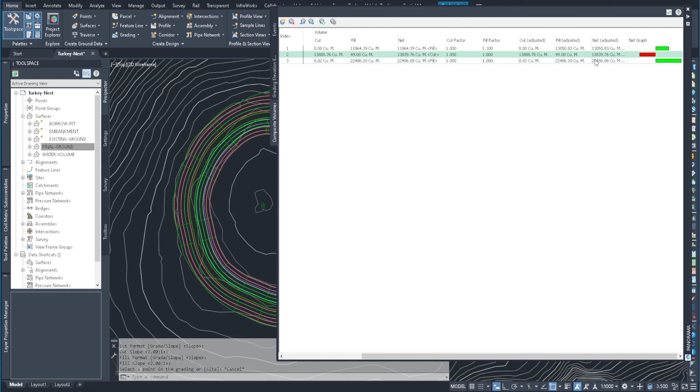And so this is it, basically how you grade a turkey nest or a complete ring dam. Thank you for watching, and I hope this has been useful.